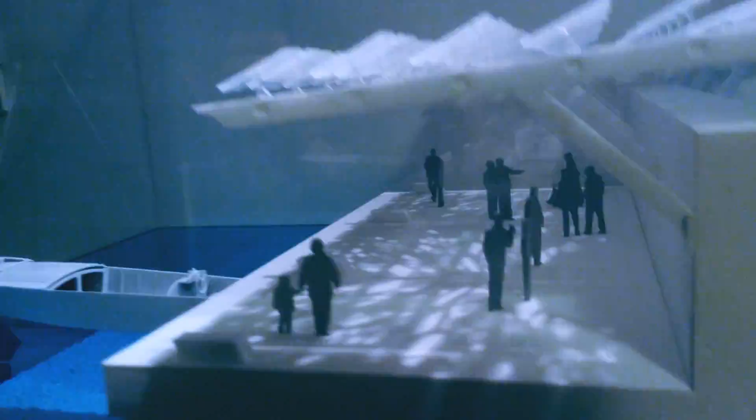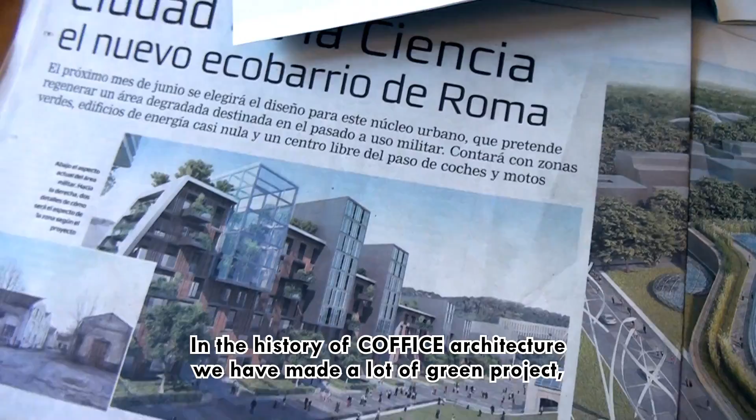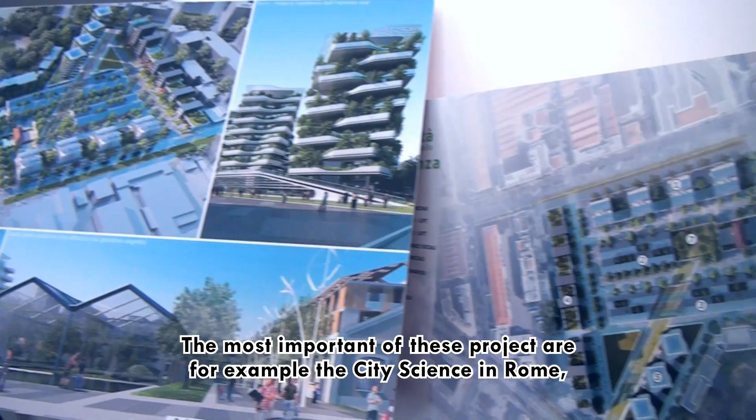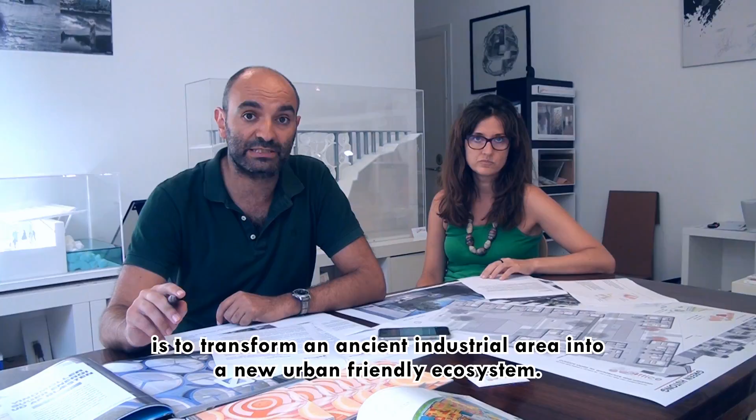In the history of COFFICE Architecture, we have made a lot of green projects, which means that we are really interested in all the projects that involve nature and building. The most important of these are the City Science in Rome, the Solar Wind in Reggio Calabria, and the Clorofilla project. The ambition of the master plan of the Città della Scienza, City of Science in Rome, is to transform an ancient industrial area into a new urban-friendly ecosystem. The project aims to become an example for new urbanization of a green, eco-friendly urban system.

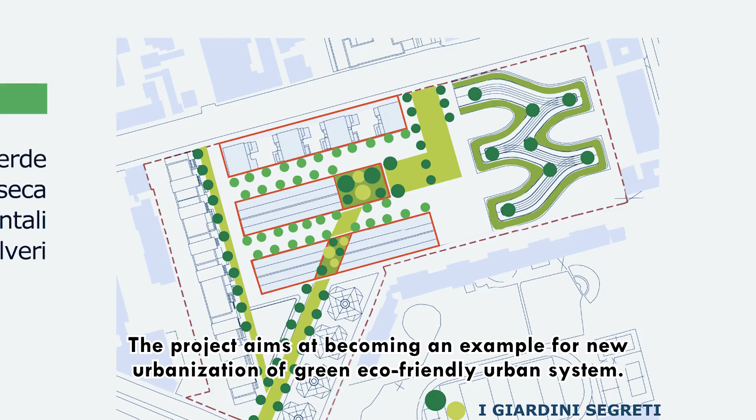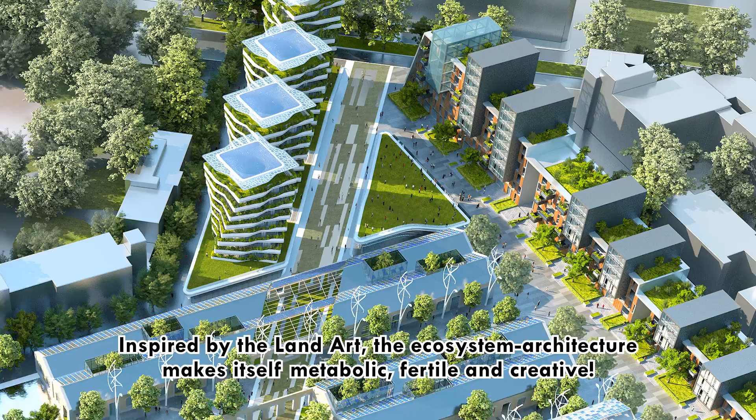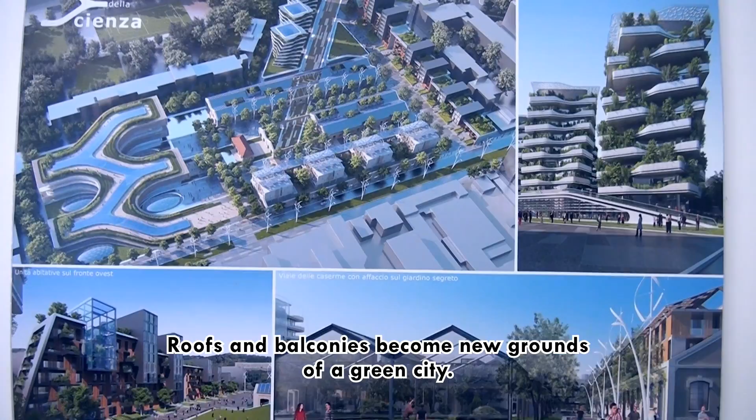Inspired by land art, the ecosystem architecture makes itself metabolic, fertile and creative. Facades are covered with free edible plants and become like epidermises, intelligent, self-regenerating and organic. Roofs and balconies become new grounds of a green city.

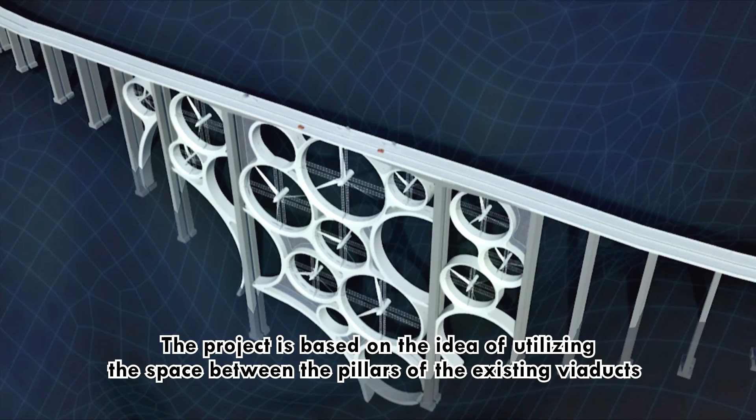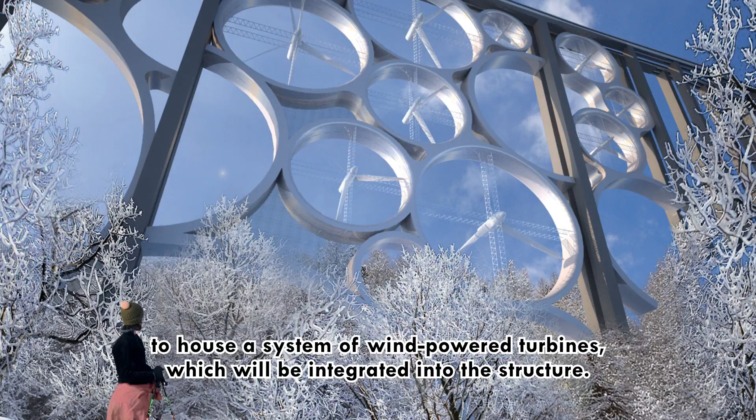The Solar Wind project, combining wind and solar power, allows for a continuous production of energy. The project is based on the idea of utilizing the space between the pillars of existing viaducts to house a system of wind-powered turbines which will be integrated into the structure.

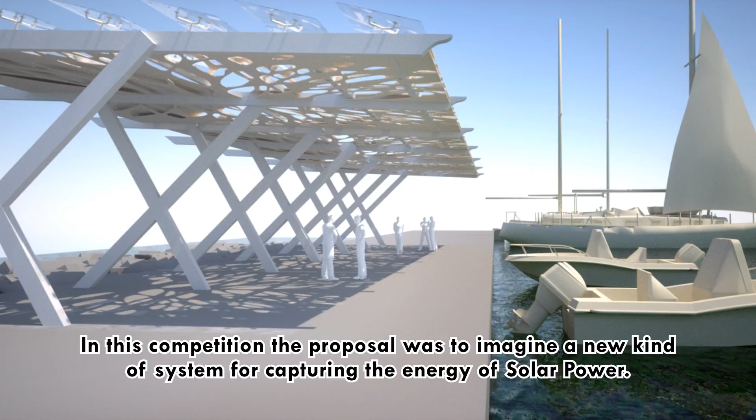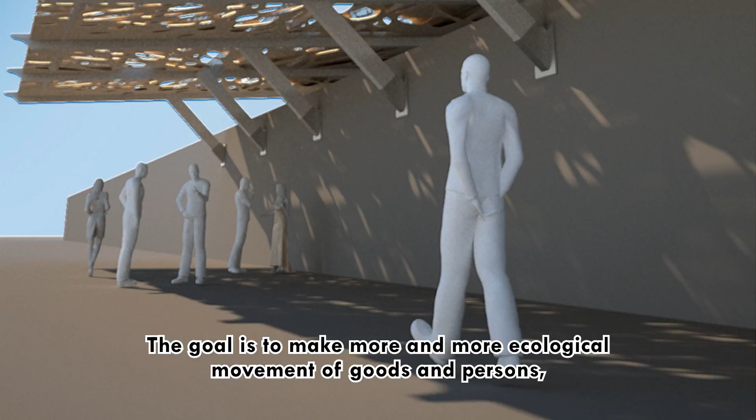The Clorofilla project was placed first in the international competition of Italian solar energy. In this competition, the proposal was to imagine a new kind of system for capturing the energy of solar power. The project proposed the construction of an exchanging parking. The goal is to make more and more ecological movement of goods and persons, to limit and reduce emissions of harmful gases, and to store renewable resources through appropriate devices, making them available as alternative energy sources.

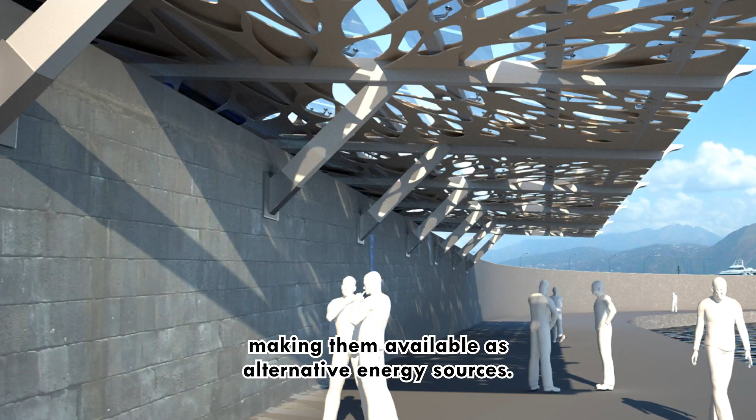To provide shelter while producing energy from the sun has always been a privilege of trees. Our reinterpretation is intended as a tribute to nature.

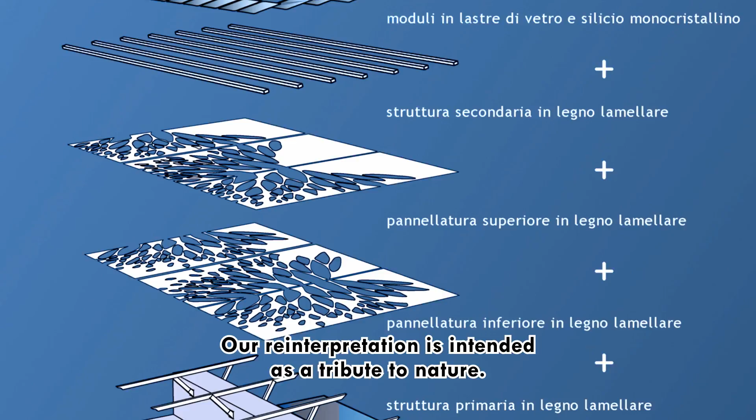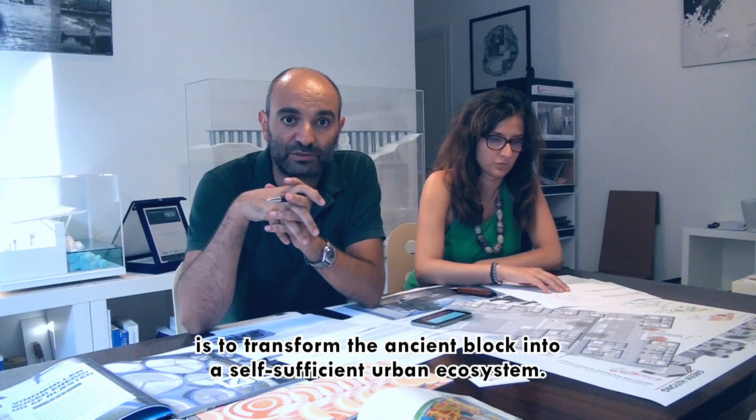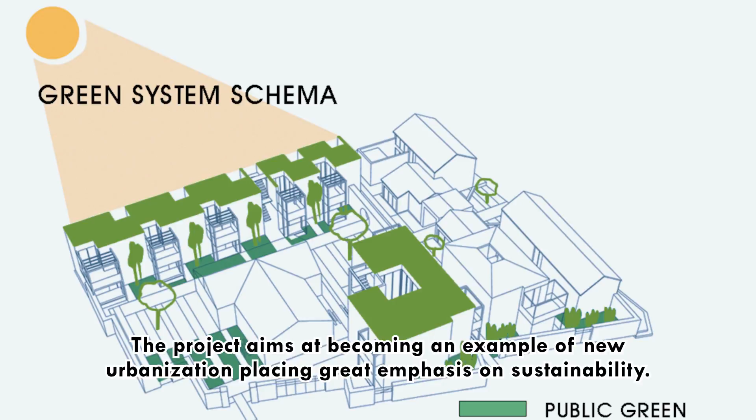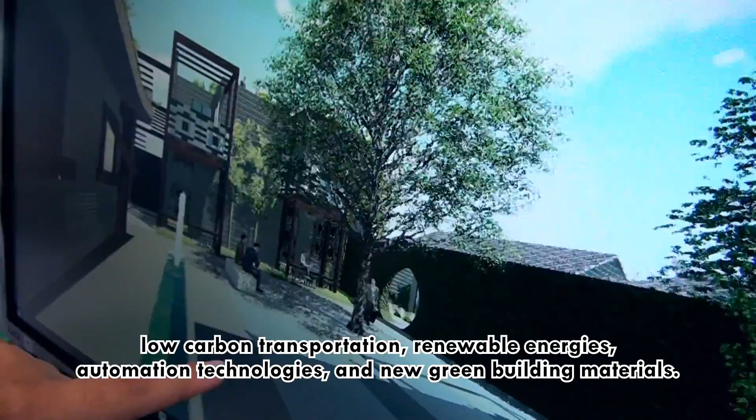The ambition of the Green Hutong project is to transform the ancient block into a self-sufficient urban ecosystem. The project aims at becoming an example of new urbanization, placing great emphasis on sustainability. In addition to building functions and visual appeal, it encourages the promotion of sustainable design, low-carbon transportation, renewable energies, automation technologies, and new green building materials.

Roofs and balconies become new grounds of a green city. The orchards and food gardens are not placed side by side with the new buildings anymore. They are the buildings of this eco-project.

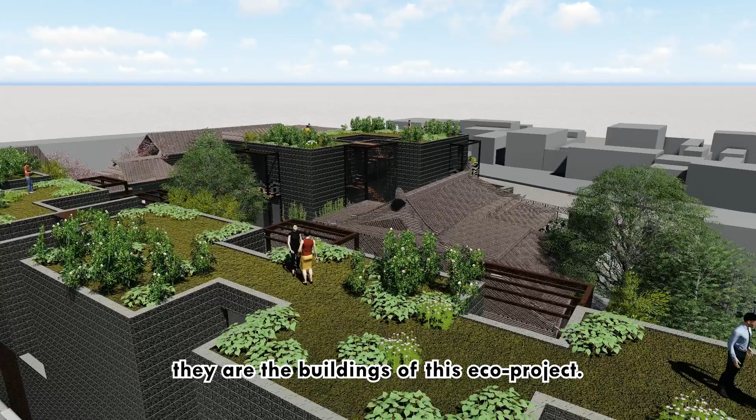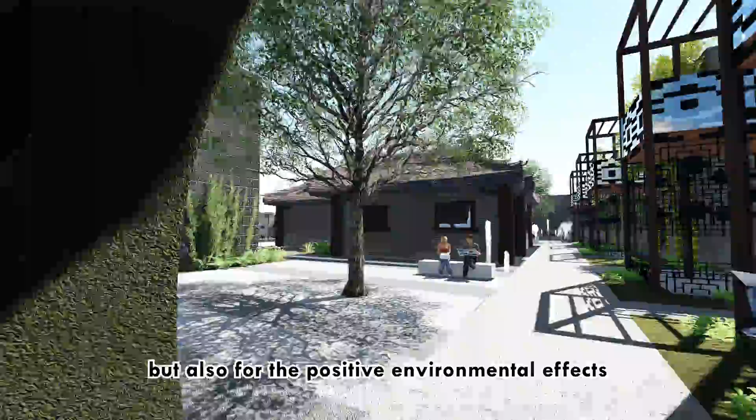In this project, all the public spaces and buildings are covered with green and trees. The intensive planting of trees is not used only for the intrinsic beauty of the trees, but for the positive environmental effects: reduction in CO2, particulate removal, and microclimates in public spaces.

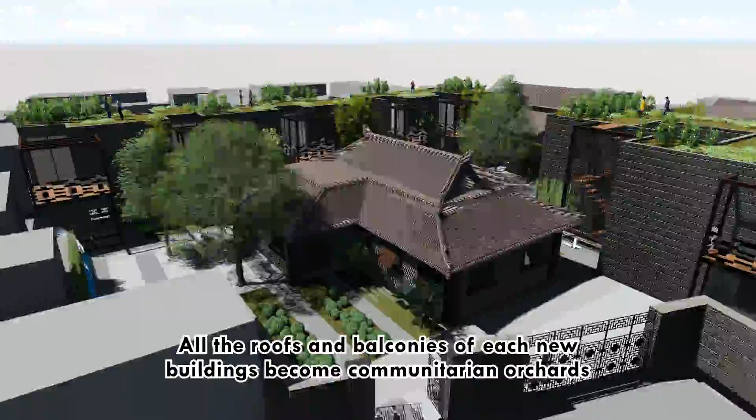All the roofs and balconies of each new building become communitarian orchards and/or food and aromatic gardens, designing a flourishing and fertile master plan.

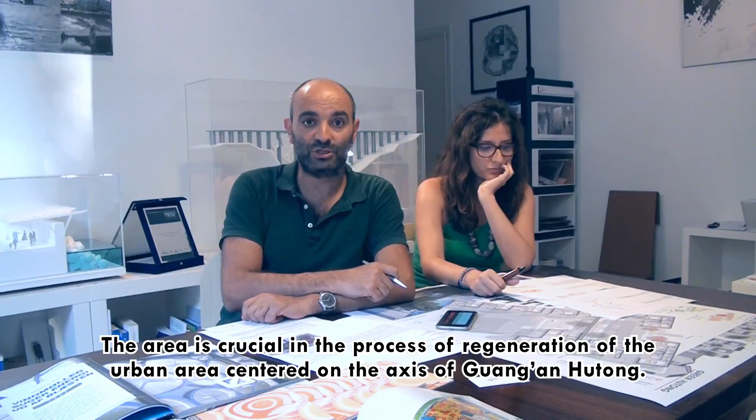The area is crucial in the process of regeneration of the urban area centered on the axis of Guang'an Hutong. It seems appropriate to build the project proposal combining the memory of the original buildings with an innovative eco-responsible lifestyle.

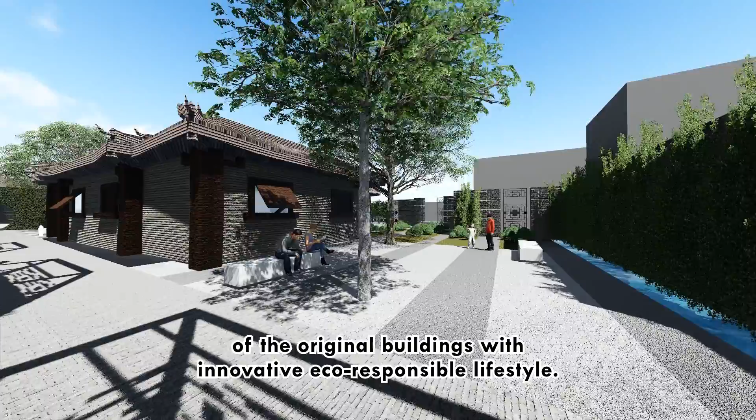The three main eco-friendly points of the project are: first, the rains are collected in water storages under the squares. The water will be reused and recycled for the green surfaces.

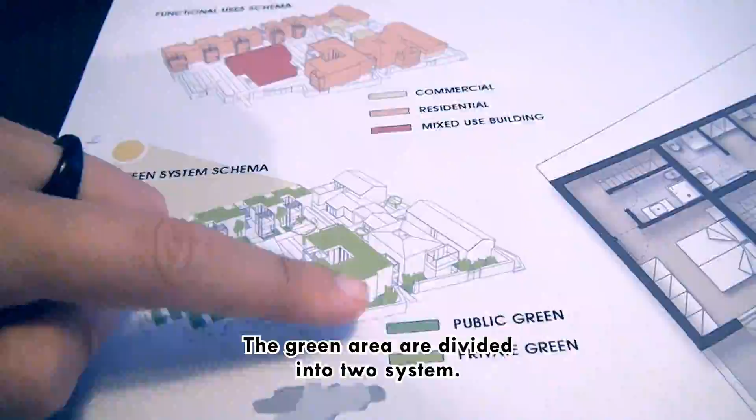The green areas are divided into two systems: one on the ground floor, where the green separates the different courtyards from each other, and the second one is the private roof gardens.

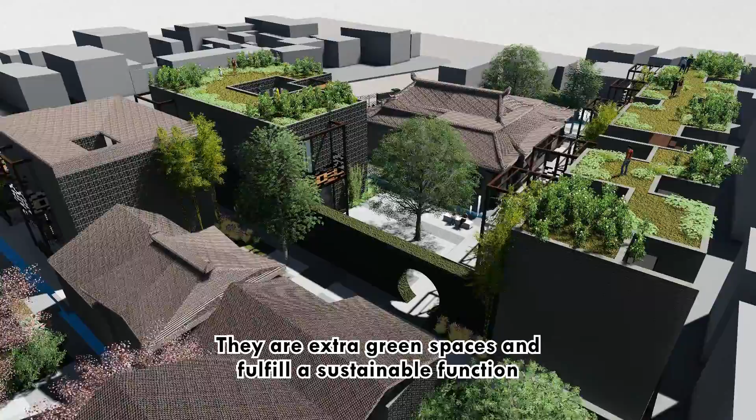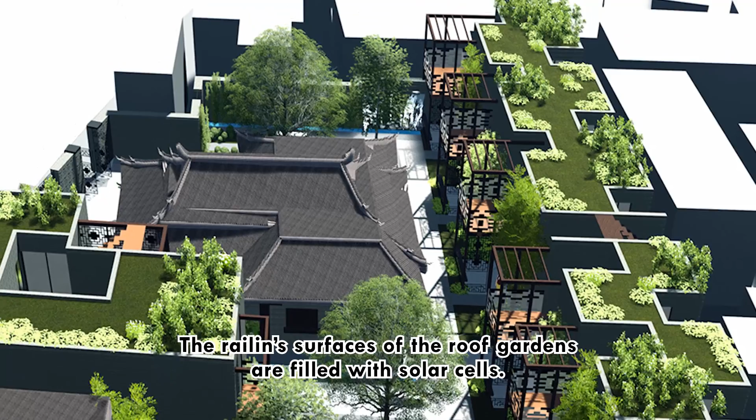These extra green spaces fulfill a sustainable function by keeping the building cool and holding water during heavy rainfalls. The railing surfaces of the roof garden are filled with solar cells.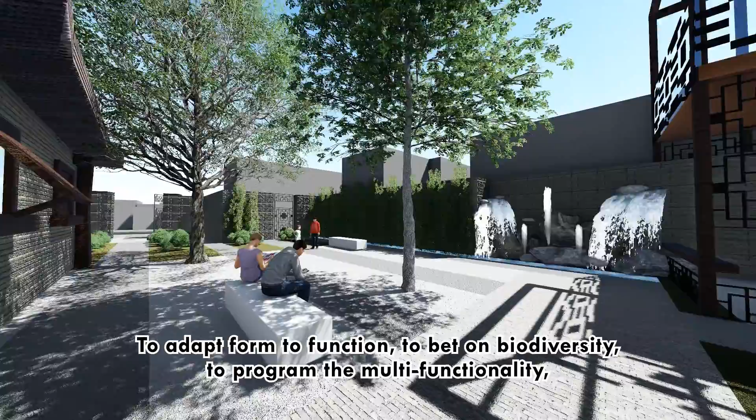To adapt form to function, to bet on biodiversity, to program multifunctionality, to encourage multicultural use and self-management: these are the keys of an urban and social success to initiate the symbiosis within the couple human-nature in Beijing.